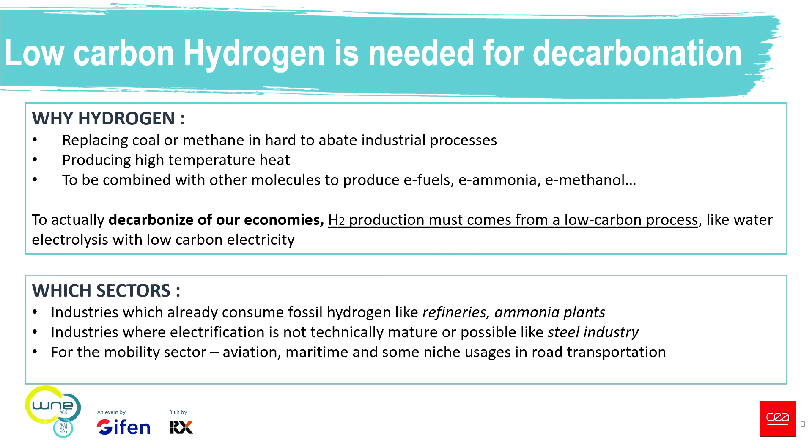So let's look at the ambition that Europe has for hydrogen production. As you can see, the ambitions are extremely large. By 2030, so in less than 10 years, the EU objective is to have 20 million tons of renewable hydrogen. This 20 million tons is 10 million tons that would be imported from outside the EU, and 10 million tons that would be produced within the EU.

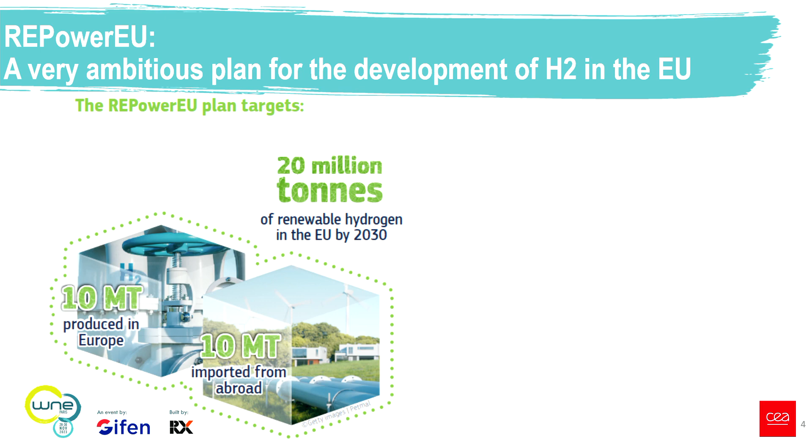And just look at the figures. What does it mean to have 10 million tons? If you want to produce 10 million tons of low-carbon hydrogen with low-carbon electricity, it requires about 500 terawatt-hours of electricity every year. That's an enormous amount of electricity.

And let's compare it to other objectives that are in the REPowerEU package. For example, when you look at the objectives for wind turbines, the EU objective is 490 gigawatts. We can discuss what the production of these wind turbines will be, but roughly it will be about 1,250 terawatt-hours. The objective is also to develop 600 gigawatts of solar PV, which would produce roughly 650 terawatt-hours.

So when you sum up and compare that with the quantity of electricity needed for production of hydrogen, you see that clearly nuclear will be needed to achieve hydrogen production targets, because these renewables will also play a role for the decarbonization of other parts of the sector.

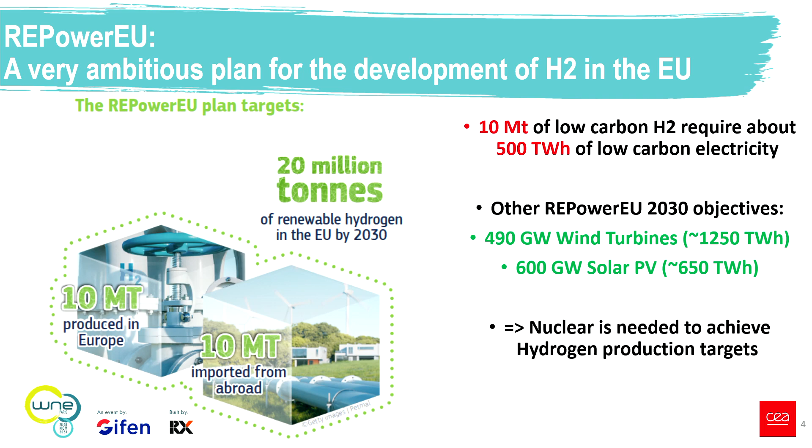Those are the political objectives. What we have tried to do is to estimate what could be the actual market for hydrogen and the derived e-molecules within the coming decade. This is a study we performed last year in CEA, supported by over 70 interviews with industrial stakeholders in France and other parts of Europe, covering more than 250 sites. So those are the main possible users of this hydrogen and these derived molecules.

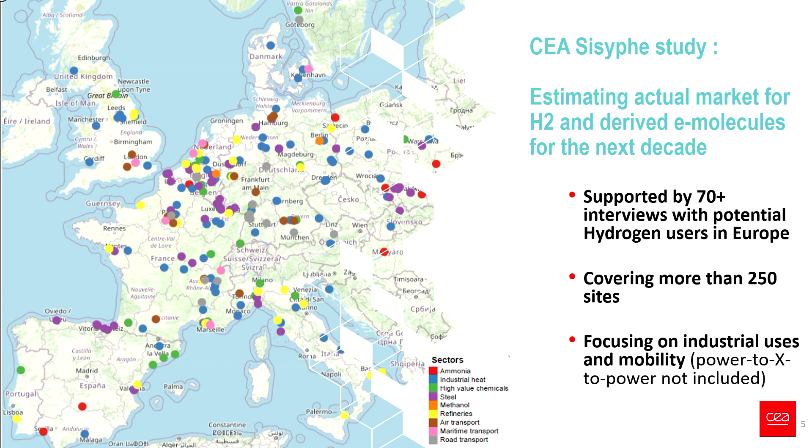And we have focused here only on industrial uses and mobility, meaning that power-to-X-to-power solutions have not been part of this study. And basically, we arrived at these results, which is our evaluation of hydrogen demand in Europe.

As you can see, we see that the low-carbon hydrogen demand will massively increase in the coming years. So we have two scenarios, a high scenario and a low scenario. But just to compare that with the objectives, it's significantly below the objective. And why? Because we have identified with these interviews and discussions many hurdles that prevent today the industrials and the mobility sector from achieving the targets that are set.

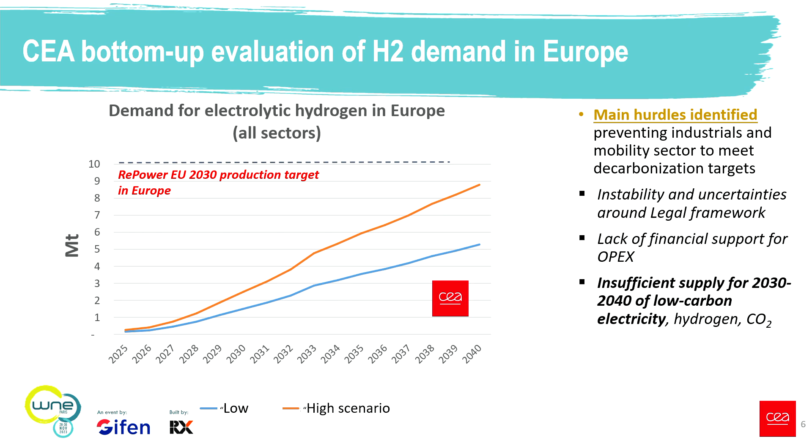One of them is about the instability and the change in the legal framework. Another is the lack of financial support, especially for OPEX to produce hydrogen. And a very important one, a perception that there will be insufficient supply over the coming decade of low carbon electricity, of hydrogen, of CO2, but really a fear, independently of price issues, that there won't be sufficient low carbon electricity in the coming decade. So again, combining what we said on the objectives and what we see from this bottom-up evaluation and these discussions with many stakeholders, nuclear is clearly needed to meet the decarbonization targets.

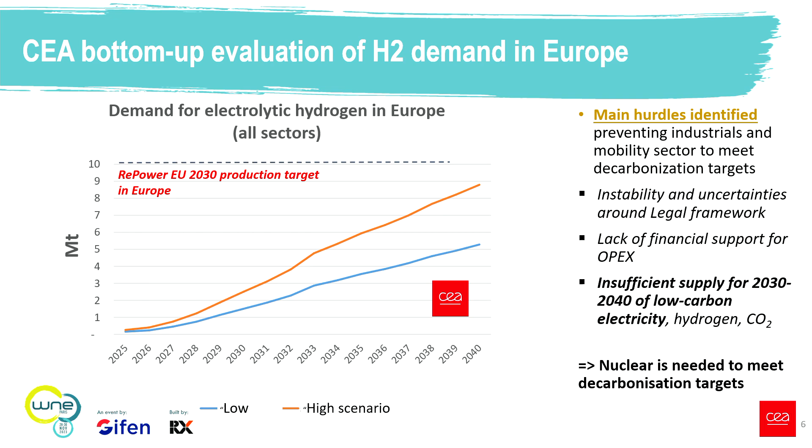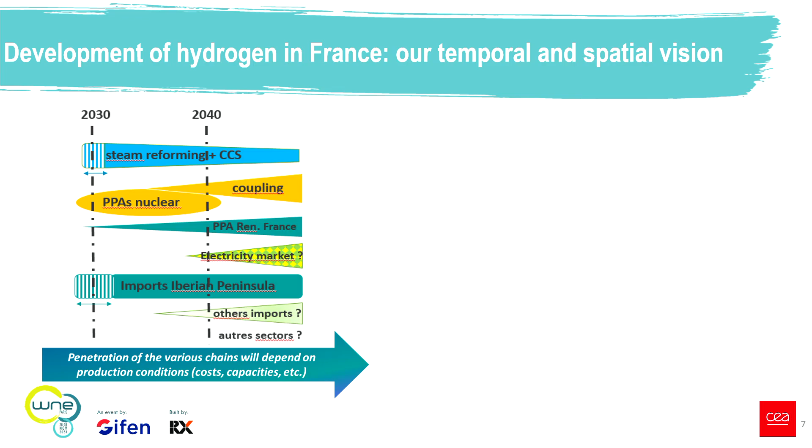And we believe that afterwards, somewhere into the next decade, there will be direct coupling between nuclear production facilities and hydrogen production facilities. So we believe that in France we will have different filières that will compete: green hydrogen from renewables, hydrogen produced from nuclear, and also imports. And all this will create a hydrogen mix that will be low carbon, and where France has a very good position compared to other countries in Europe.

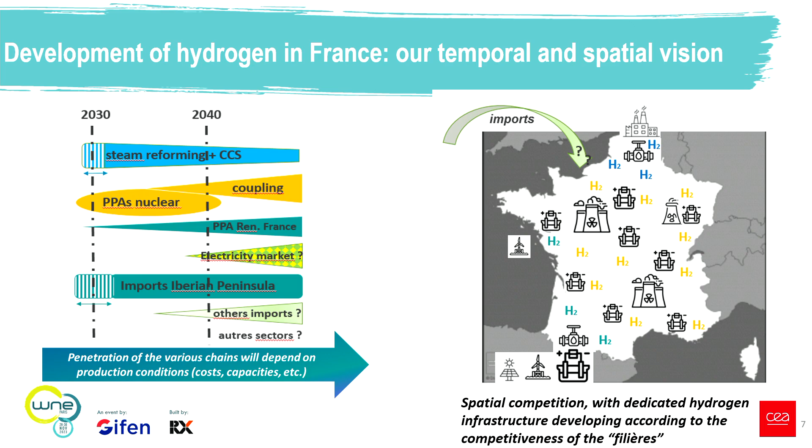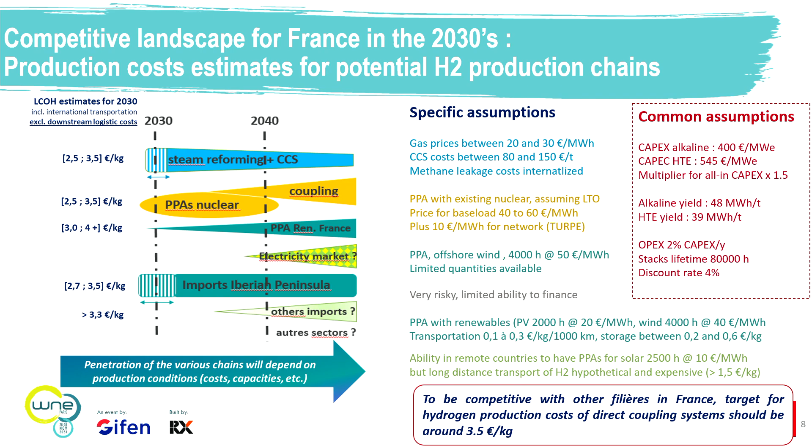Yeah, thank you, Bertrand. So I'll take it from here and focus more specifically on the coupling side and the technical solutions we develop at CEA to couple nuclear heat and power with electrolysis. So first, to give you a broad overview of our work plan to address using nuclear heat and power beyond electricity, we developed an approach which focuses on 4 streams. The first one is to study the markets and the uses there would be for heat and electricity for various branches of the industry. And then from these case studies, we can target new opportunities for nuclear heat and power to develop in combination with specific processes and define associated hybridization configurations.

And then when we found these first use cases, we developed the technical and economic evaluations for each type of combination. The first one we saw was that there was a use case for an SMR dedicated to low temperature heat, just focusing on supplying heat to the market. The second one is to develop the coupling, like Bertrand mentioned, between an SMR and a high temperature steam electrolysis system to maximize the energy efficiency of the whole coupling. And in the fourth stream, we go on focusing on further needs, such as producing synthetic aviation fuel, which will be a big driver for the market in the coming years.

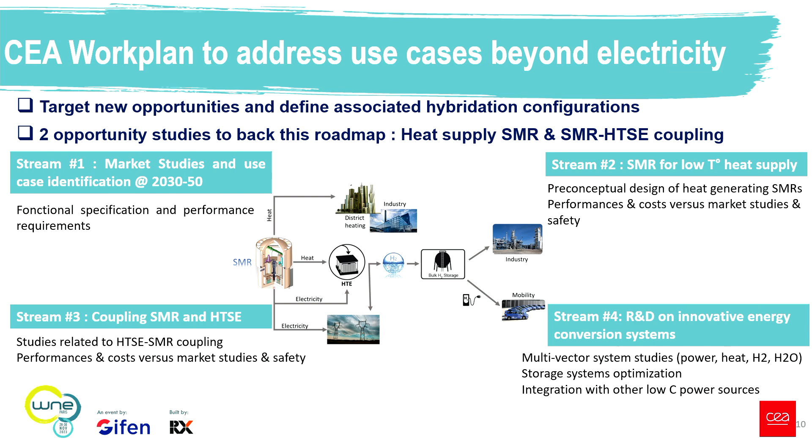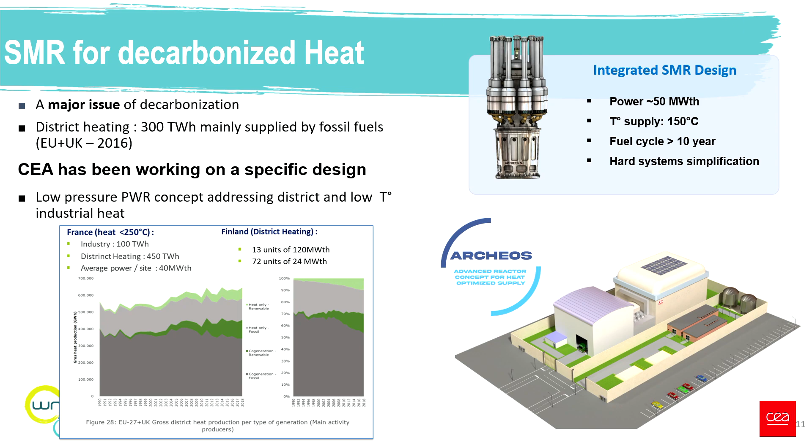So going first rapidly through the first use case, we saw that there was potential for the industry and also for district heating to make use of a supply of heat around 150 degrees C, and from that we could derive and greatly simplify a PWR design to just focus on producing heat at 150 degrees C, which would, as a consequence, reduce the need to pressurize the reactor and simplify the design very much. So we developed a basis for this kind of design, and we have been working on the use case both on district heating, which is heavily fossilized, as you can see on this graph, and also on the industry. So that's the first use case which we covered through our research.

The second one, which I will cover more extensively, is the coupling of a PWR type SMR with high temperature steam electrolysis. Now, this process works at between 600 and 800 degrees C. So you see that there seems to be a mismatch in the heat and temperature level. But in fact, most of the heat you need to supply to this process is to transform the liquid water into steam. And that happens at 100 degrees C. And moreover, this process is exothermal.

So you can use the excess heat of this process to heat up the steam to the process temperature of 600 to 800 degrees C. And as a consequence, we found that technically and also economically, it was viable and suitable to couple a PWR type SMR, for example, such as a NUWARD concept, with high temperature steam electrolysis to provide heat and electricity, and you can then derive even excess heat back to the system to further maximize the quantity of hydrogen you would produce with such a coupled system.

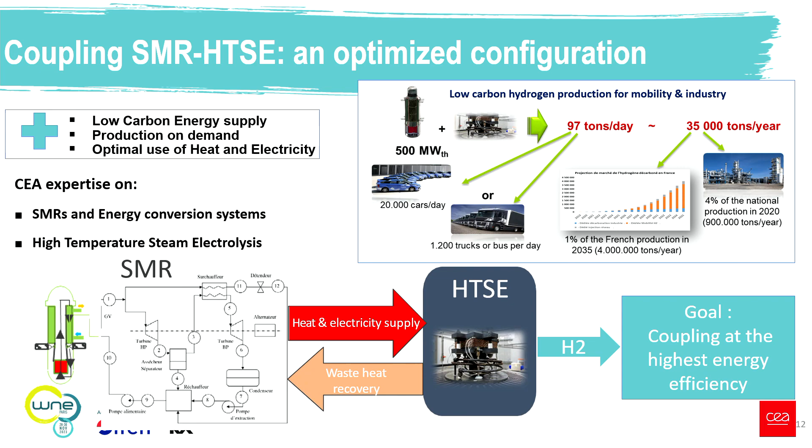And so with a roughly 500 megawatt thermal power SMR, you could approximately achieve 100 tons a day of hydrogen production, which was really the main focus of this study, to optimize the use of heat and electricity to maximize the production of hydrogen.

So we developed basically an approach in which there is the SMR and its energy conversion system. There is a middle brick which is in between, which covers the transfer of heat and energy between the two systems, and also which takes care of the transients, because you don't want to directly couple all the transients of your nuclear reactor with the transients of your electrolysis system. So this middle system is there to optimize the heat flux in both directions, and also to cover the variations in both of the processes. So we did the first economic approach, this is what Bertrand told you about, and we designed an optimized version of the coupling model, which we patented.

Another point which is really important is that if you want to maximize energy efficiency, you have to focus on the use case you want to cover. You cannot design an overall system which covers efficiently all the use cases. So basically, we studied some examples of hybridization use cases, which could be, for example, maximizing hydrogen production, or maximizing the return on your investment. That is, you would sell electricity when the electricity price is high, you would sell hydrogen when your electricity price is low, or you would do some service to a community. You have a specified amount of electricity, of hydrogen to supply to a given network.

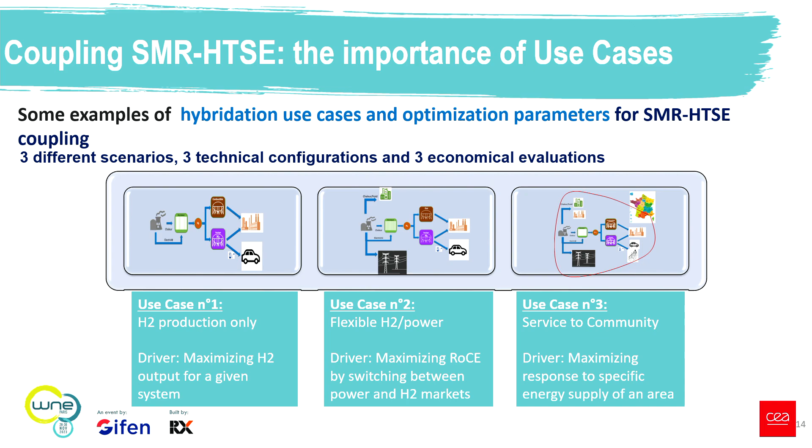And so from these three different use cases, you can derive three different technical configurations. And that's the point. You have to study specifically the use case to derive and adapt the technical configuration, which pushes the need for this middle brick, because you're not going to design an SMR for each use case. You're going to design this part of the system, tailor-made for each use case.

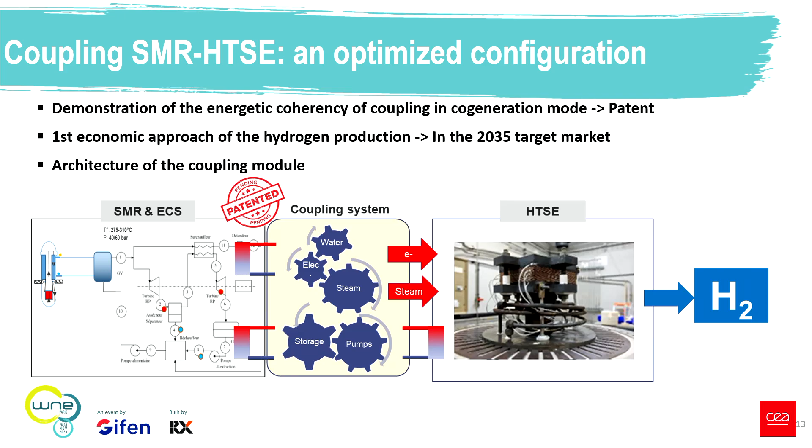Then we went further, and like Bertrand told you, we think that in the future, on top of being able to produce hydrogen from low-carbon electricity, we will also have to still provide carbon products, because for some hard-to-abate sectors, it won't be possible to get to electrification or using hydrogen. You will stick to liquid fuels, for example, for long-range aviation. And so we derived specific coupling configurations using carbon capture with different mechanisms, either from biomass, from concentrated sources, or from direct air capture to provide the carbon from CO2.

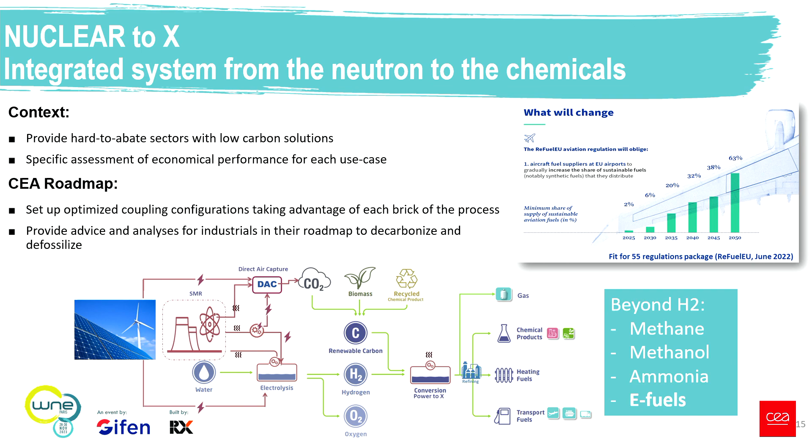We still have the electrolysis, and there I must stress that electrolysis needs clean water, which you will also have to produce in the future in regions where there is water stress. And then you can combine these two atoms and produce the molecules. And one of the big drivers for that is synthetic aviation fuels. Because, as you may know, the regulation, the Fit for 55 package, specifies that by 2035, 5% of all aviation fuel has to be synthetic aviation fuel, and by 2050, 35% has to be synthetic aviation fuel.

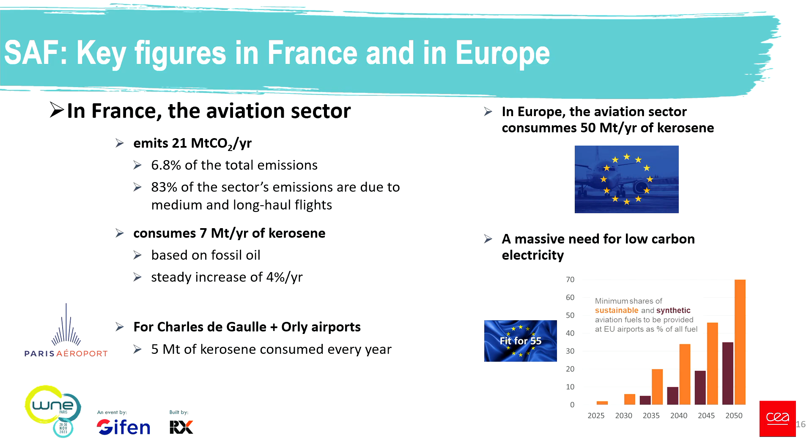So when you compute these percentages with the amount of fuel which is used for the Paris airports, for example, which is roughly 5 million tons of kerosene a year, and which is expected to increase further in the coming years, you can deduce that there are very significant amounts of synthetic fuels which have to be produced, so 250,000 tons by 2035, which then in turn requires massive amounts of low carbon energy to be dedicated to this kind of production, massive amounts of hydrogen, massive amounts also of CO2, which you will have to capture and reuse, and that can be translated in numbers of large-scale power plants or windmills with 8 megawatts at 45% capacity factor.

So the main point is that if you have to abide by the Fit for 55 package, by 2035, roughly 1 EPR type power plant is needed to supply the Paris airport. That's 10 times more for Europe. By 2050, that's 7 EPRs for France and 10 times more again for Europe. So massive amounts of low carbon electricity will be needed if you are to stick with these kind of numbers. And we are developing solutions to achieve that and to upscale also the coupling between the different parts of the systems.